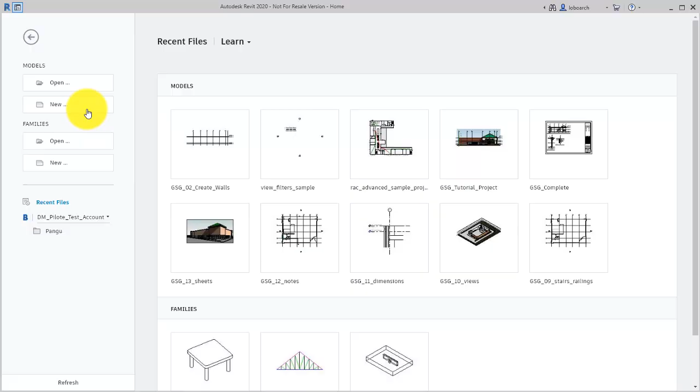To create a new project, use a project template. Click the New link on the home page. You can change the default templates in the Options dialog, accessed from the application menu. Here, we'll browse to a specific template used for this tutorial.

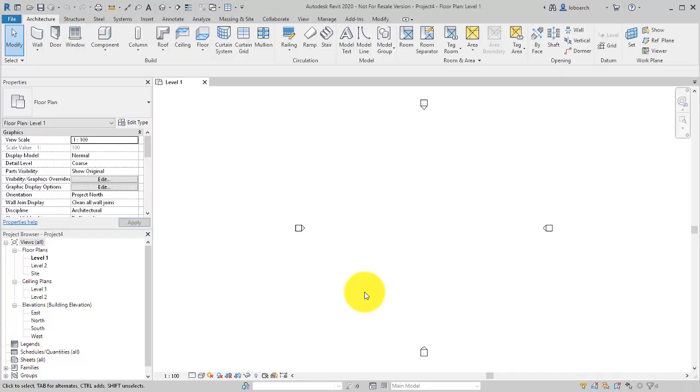When first starting a project, it's a good idea to establish level datums, which provide a framework for building your model. To see the levels in your project and place new ones, you must first be in an elevation or section view. In this case, open the south elevation by double-clicking it in the project browser.

Notice that 2 levels have been defined for this project. You will want to rename these existing levels to reflect your own project naming scheme. To rename a level in the view, select the level, click its name, and enter a new name.

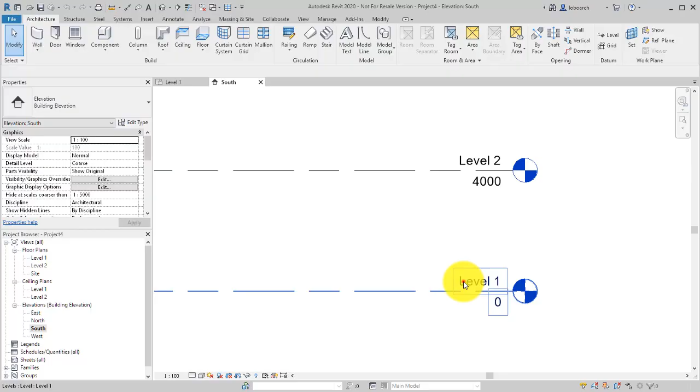When you rename the levels, you are asked whether you also want to rename the corresponding views, that is, the plan view and the reflected ceiling views associated with this level. Click Yes to automatically change the names of those views in the project browser.

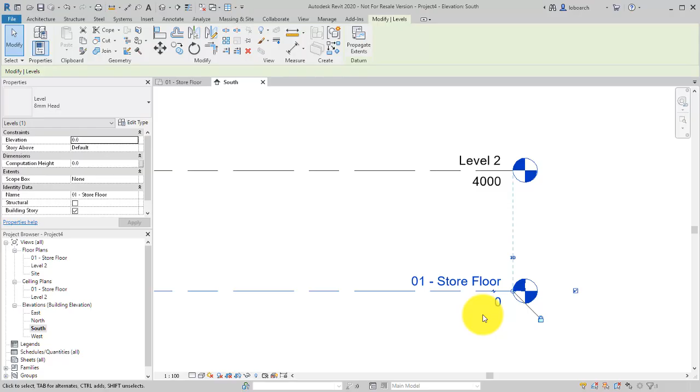As an alternative to renaming the level in the drawing area, you can right-click the name of the level in the project browser and select the Rename option. Again, you are asked about corresponding views, and you click Yes.

To change the height or position of a level, you can select the associated dimension in the drawing area and enter a new value. The level marker will move to the new position.

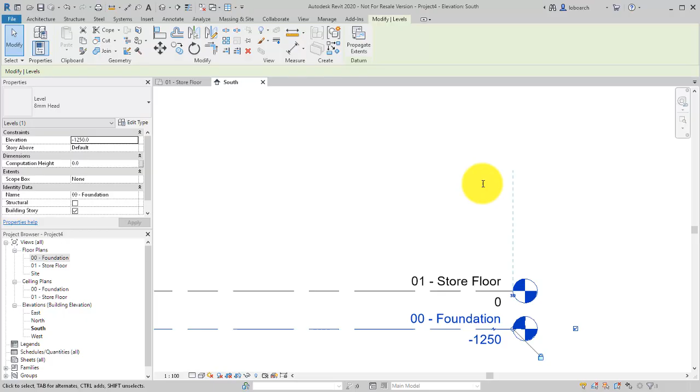To add a new level, select the Level tool from the Architecture tab of the ribbon. When you use the Line Drawing tool, the level will snap into alignment with existing levels in the project. You can also use the temporary dimensions to help you position the level.

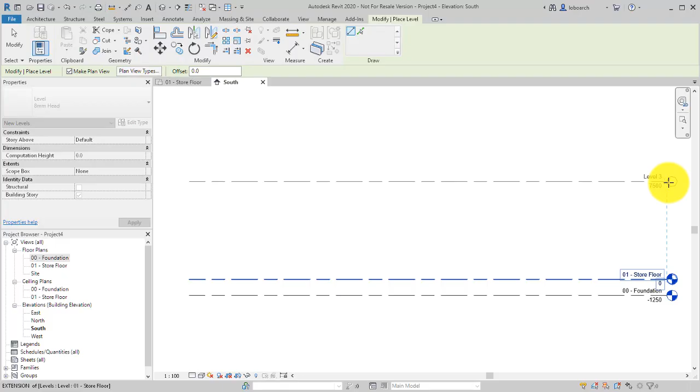And if the level is placed in the wrong position, you can always reposition it by editing the dimension or dragging the elevation marker.

To place the next level, select the Pick Lines tool from the Draw panel. When using this tool, you can select an offset value to place the level the specified distance away from the line you picked. In this case, you offset the level from the pick line by 500 millimeters.

This level only represents a datum for the project, not a building story, so a plan view is not needed, and the option is cleared on the options bar.

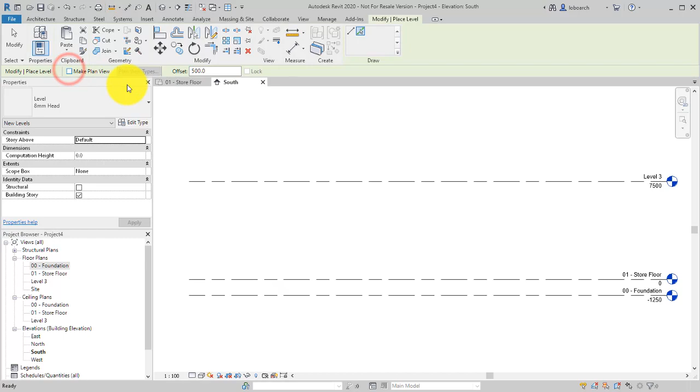Because these 2 levels are very close to each other, click the Add Elbow control on the level line and adjust the position of the level head.

The 2 new levels are now listed in the project browser, where you can rename them using the right-click method. The project browser sorts the levels by numerical or alphabetical order by default. In this example, the naming scheme begins with a 0 and the number to keep the levels organized in the project browser.